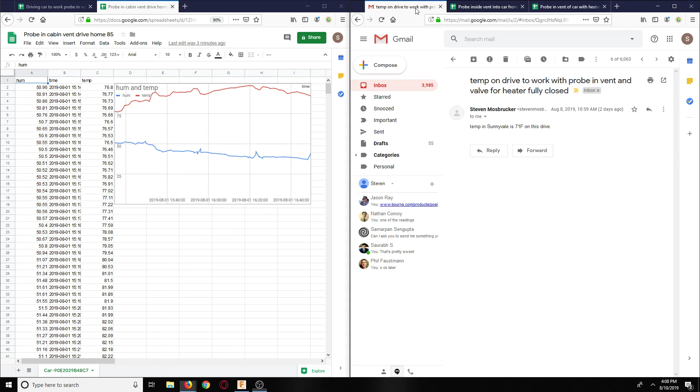So braking, I am working on a little bit, figuring out what kind of brakes I'm going to change to, and when I order that stuff, we will talk about it when that time comes. So I'm going to try to keep this video as short as possible compared to my last video. And I think here I have quite a bit of data. Speaking of which, let me bring this to the other screen and let me look for it. 1979. Okay, there it is. Yeah, that's it.

Okay, cool. So basically, one of the things that I wanted to get in control is not necessarily having to do with the turbo, but in general, it's for ease of driving, and I would definitely like to do it before the turbo, and it's going to be pretty easy to fix. I actually have two parts for it, and I'll show you the second part. I don't know if you remember, but I talked about it briefly in my YouTube video, so let's go ahead and look at that YouTube video again.

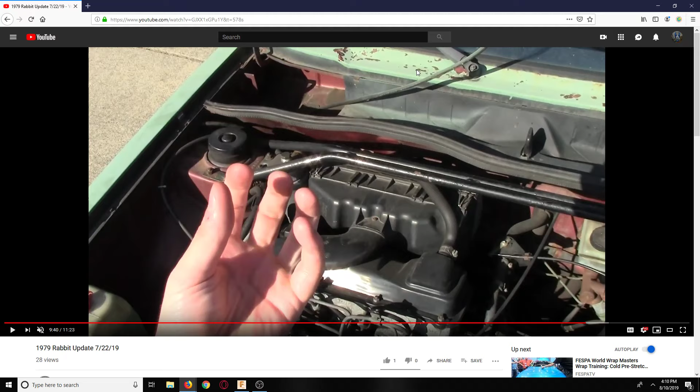Pretty much what I was doing was showing you guys me looking around the car, and we saw that there is this heater box, right? And there's this heater area where the intake inside the car is coming from. So here it is. The idea here is we're going to be talking about this intake again on this side for the inside of the cab. We talked a little bit about the intake here, and we do have some updated information on that, so that will probably be the second video for today, and then the third video is going to be on the Mustang.

So here, of course, we have this tray here that doesn't let water go inside your heater box if it's perfect. In my case, I have some holes and stuff, so water can still drip inside. But basically, the idea is that there is this box, and in the hood there are holes, and the air comes across and goes down into your intake into the car, whether you have the motor on or off.

Now, there are two holes here, one here and one here, so that if rain gets down there, it can fall inside the corner of the engine bay and out onto the street. Normally there's supposed to be a rubber grommet that goes there, and I actually found the rubber grommet. So let me show you where you could get that. I bought it for 20 bucks because I've recently been going through eBay looking for this kind of stuff. So let me go ahead and show you that.

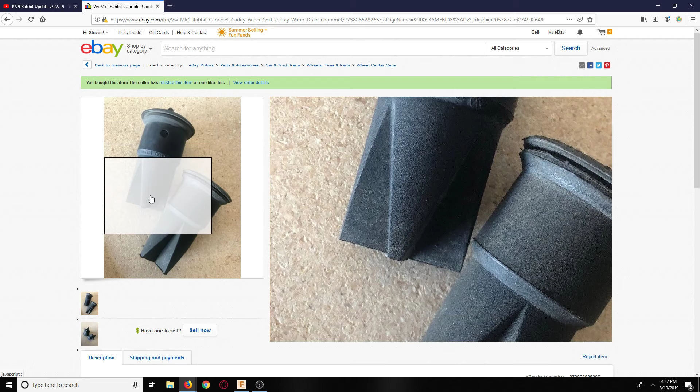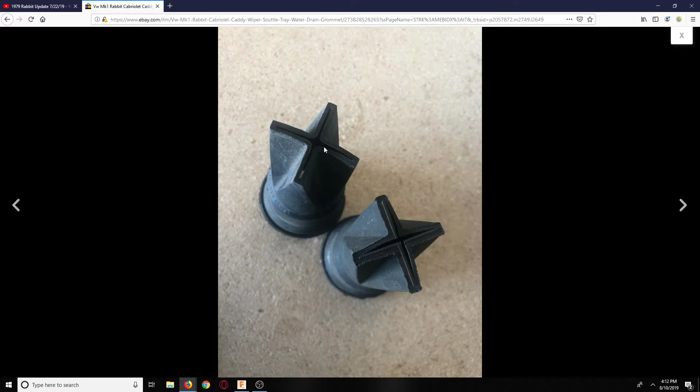Oh, there it goes. So I did buy the grommets here. So these grommets go inside that metal piece, and pretty much what they are, they're rubber, and they close up almost all the way. They close up here, and then when water gets on top, they open, they let the water come out. So if there's any sort of weight on here, these are so thin and so flexible that it lets the water drain out, but it does not let a lot of the heat come in.

And then on the passenger side, you have the tube for your sprayer go through there. And so this is going to be a big upgrade, and we're going to do some more testing after I install these guys. I don't know when they're coming in. This case, Monday the 19th, so it would be 9 days, but today's Saturday. I think I ordered it Saturday last week, so maybe this coming Monday I'll have it. I'll have to look at the tracking details. I might look at it on the other screen.

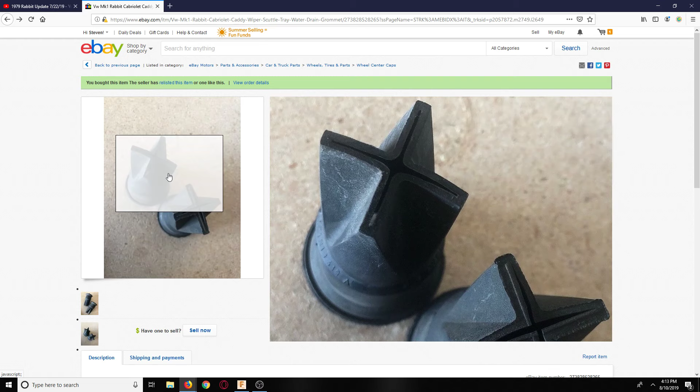So if you don't already have this on your Rabbit, definitely get this. This is going to really help keep you from sucking in hot air in here. So again, that grommet goes here and goes here on the other side, and 23 bucks, $3.50 shipping from Indio, California, which is already in California, so it's great for me. And that's what the Rabbits use stock. My neighbor's car also has this on it, and so I know for sure it's definitely a stock item.

So I don't know, it might be a reproduction, and here's a scuttle tray, I guess they call it. This might be a reproduction, but very, very similar to the original, and I'm sure it's going to have similar performance to the original. Oops. So again, get that guy if you don't already have it and you just have holes here. Don't tape it like I did. Put the right thing that goes in there. So now I don't have to print anything. So now we have limited the heat that could possibly come up through the holes, go inside, and then go down, which I'm pretty sure I looked at that.

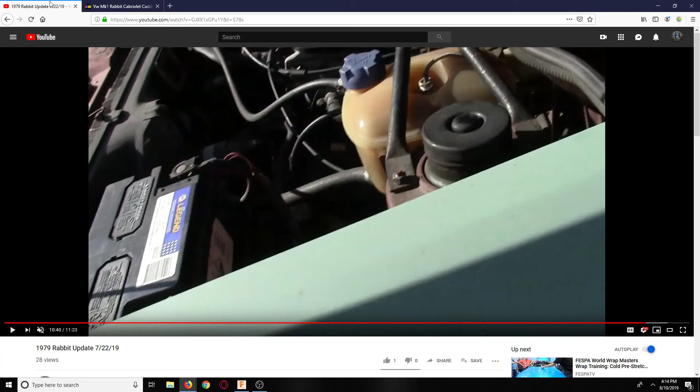Yeah, so it's right up in there. Anyways, so now we have those plugged off. So now a big thing, what I'm curious about, is what I talked about in the last video, which was where the heat, oh, there you go. See the holes? If you have holes like that, then you need to plug them with those rubber grommets. And here I'm showing what the rubber grommet is, and I finally found some, so that's good.

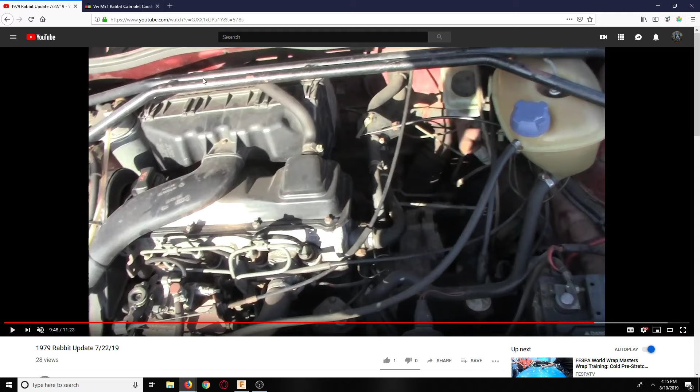Anyways, so the next question is whether or not it's getting so hot here behind the engine that this is heating up, that we're getting a lot of heat exchange through convection, like I said, which is one stationary piece of solid material and then a moving fluid, usually air or water. So in this case, we have air going across here and sucking some heat inside. That's one option, and the other option is that there's this valve here. And this valve is basically what controls the heater inside the car. So this is what allows heat to go inside or not go inside.

And if you notice here, this is closed. So all the way this way, with the rod pushed all the way out, that is cold, and pulled all the way in, that's hot. So if you notice here, there's a little spot here and a little spot here. Now, if it's all the way touching this side, it's for cold, so it does not let any fluid in. The valve is completely closed. And you notice that it's 90 degrees. So the valve is completely closed. Now, this other way, the valve is a little bit even past open.

So let me go ahead and show you guys that with this. So here's the valve itself. So this way is closed, right? And if we look here, you can see that this is this here. So yes, this guy here is closed, and then this is all the way open. So this lets all the fluid in and this closes the fluid off.

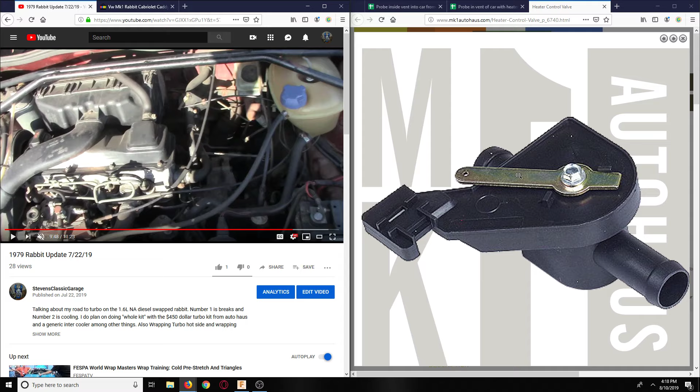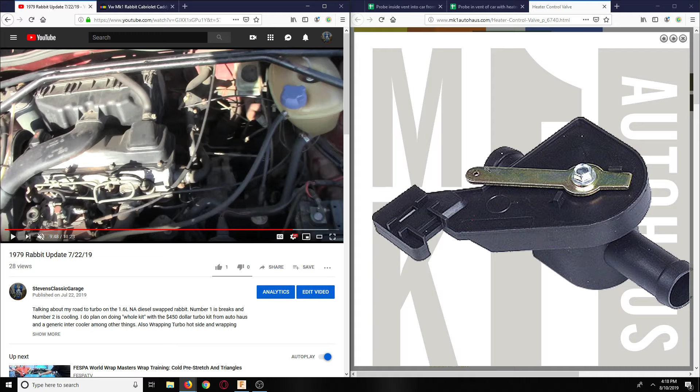So in order to go 90 degrees with this particular throw that your heater controls can do, one of the things that we can do is we could shorten this up. So we unscrew this thing, cut this off, round it because we have it taken off, and then put the hook back on there, right? Put the hook hole over here somewhere. That way, when we push it all the way, it'll actually go all the way closed or all the way open for the heater itself.

But let's go ahead and see if that is actually a factor. So that's one way of fixing it. That's the easiest way of fixing it. So either the valve is messed up, and we'll see right now if it's messed up or if it doesn't actually close any further, because we have some values. So let's see here.

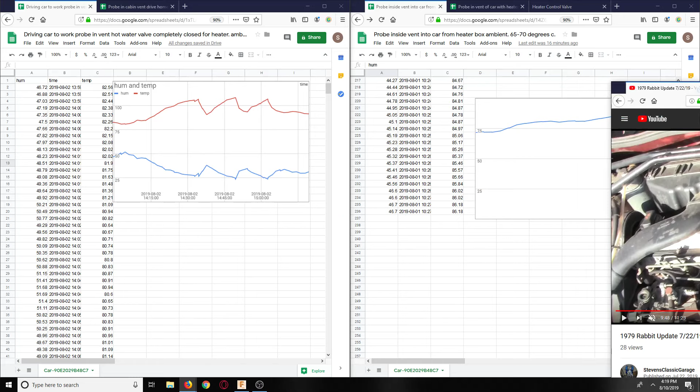So drive home. So this is drive in the morning. So here, driving to work with probe in vent, hot water valve completely closed. So this side is with the valve completely closed. So basically what I did is I went inside the hood, and I just pulled this guy until this closed all the way. I should have taped it, but I looked after I drove home and it was still closed all the way through.

And then I had this with normal, where it wasn't completely closed, and it was just where I would push the heater control all the way to one side. So this is probe inside car, and these are both the same day, whether it's driving to work or driving home. And both of them I have the ambient temperature. So 65 to 70 degrees, and it wasn't Celsius.

And this is drive home, 78F. So you can see it was very, very hot that day. It went up another 8 degrees towards the later end of the day. So right here we have the temperature plotted, and remember we have to take this with respect to 65 to 70 degrees. We can think of it as 70 degrees. So if we look here on this guy over here, we see that ambient is 71 degrees.

And at 71 degrees, we are up at 80. Let's see at the start. So here at 65 to 70 degrees, and then this one's 71 degrees. It seems like we're up at 82, and here we're up at 71. And as you see, as we continue, it is increasing temp.

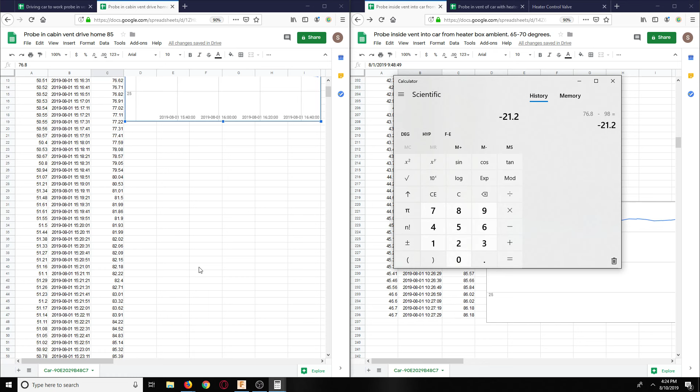It looks like the maximum, we're still going. Saw 98. And we're going down. That's 21 degrees. So we start off 76 and we go up to 98 degrees. So maybe we might have a leaking valve in this case. It might not be closing all the way. So that might be a possibility. So let's look at this one, and then let's look at this one.

So this is driving car to work, probe in vent, hot water valve completely closed. So here we're starting out at 82.56, and here we're going up to 105. 107. It's also 22. So very, very consistent. But you can see here that we're staying pretty low, then it goes up there. I was probably sitting in traffic for a while, and the sun was baking down on it, and I didn't really have any airflow coming through.

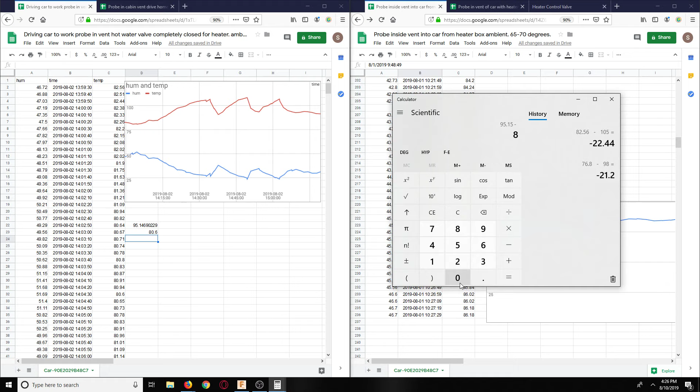So let's see, can we run an average? Let's run an average. So average is 95, and then let's look at the min. I don't know if I could do this. Let's see. Yeah, 80.6. So 95.15 minus 80.6 equals 14.55. Okay, so that's good. So let's look at this one. Let's do the same deal.

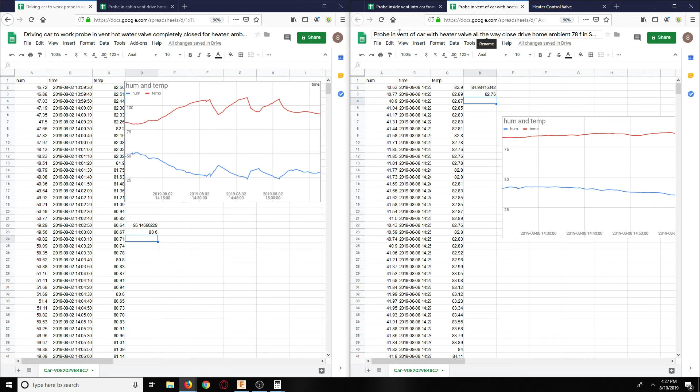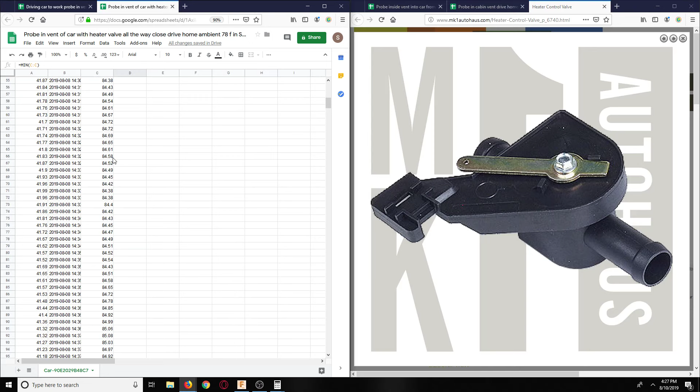So that's only 9. What about this one? This one's only 2. Wait a second. This is probe in cabin vent. So this goes over here. This one goes over here. Okay, so now we look really, really good here. Yeah, this is a good... So this one might not be the right one then. Drive car to work. So it's driving to work. But this one I'm driving home.

Yeah, 78F, that's in the afternoon. And I think this is the most recent footage. And I did notice while driving that it was quite a bit cooler than it normally is, so we definitely had that on our side. So pretty much what it looks like is here, car drive home.

And then this is really very, very hot outside temperature. So 76.46 minus 91.85 is going to be a negative number, obviously, but that's 15 degrees, and then this one's 2 degrees, right, from start to finish. And then this is only 4 degrees, so at maximum, it jumps 8 degrees compared to ambient, which is really, really good.

Because again, ambient's changing as far as where we go. So it could at some points have been 80, it could have been less. But let's say 78 degrees Fahrenheit average. But I don't know what happened here. It looks like some stuff was all over the place, because it's jumping up and down erratically, pretty much.

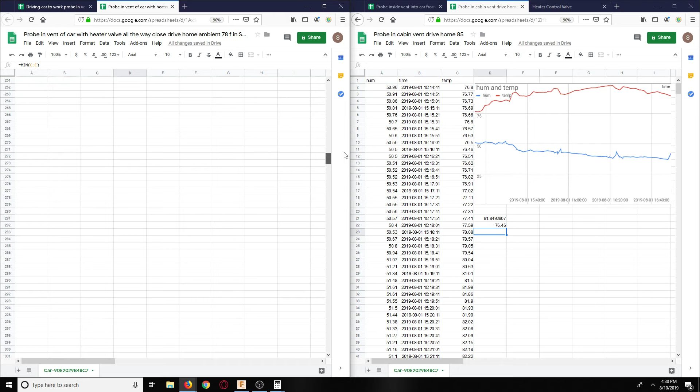Because this one, I'm sure that this is a long one, so this is from 2 to 480. So that's 48 minutes. That's about a 50-minute drive home. So that's definitely a longer time sitting in traffic. Now this one is 2. Oh, this is a short one. So this is a 25-minute drive to work, looks like. Oh, drive home. I might have drove home on that one at 2 o'clock.

So what I'm thinking is that this is definitely an issue, that it's not closing all the way. And you can see here these two, which are both inside the vent with just regular heater box closed. This one we have a 9 degree. This one we have a 5 degree or so. This one, I don't know what happened with this one, why we have a 40 something, while we have a 5. Wait.

Oh, that's a good one. Yeah, this is a 15 degree delta here, because I'm thinking that that's a really, really long drive home. But so is this one. This one's 571, so this is a 57-minute drive home. So why is it exactly that? I don't know. So maybe this is dirty data here. The data here is probably messed up, or the probe didn't go all the way in, or whatever.

So obviously, I'm kind of trying to match it to meet a conclusion, but I don't think that is the case, because this is pretty erratic here. You could see it here. That's pretty erratic, and I think it has a lot to do with maybe where I was. It was way hotter than that, and so I would sit in the traffic abnormally long here, and it would get super hot, and then I would start to move and drop, get stuck in traffic, and go. That's why you have this sawtooth looking piece here.

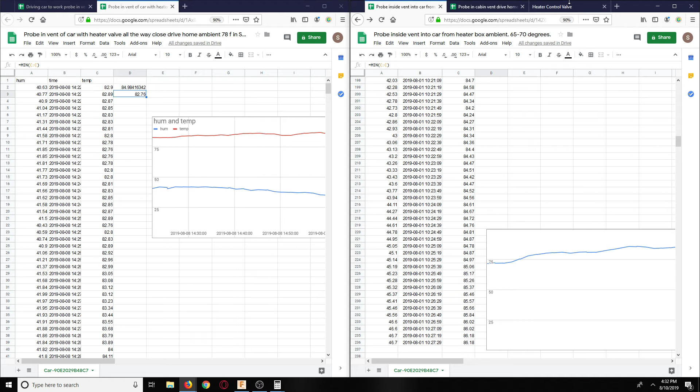And then here it's very, very smooth. Here the graph is at the bottom. Here it's extremely smooth. And here it's nearly flat. So what I think we should do is look at getting a new valve, but I think that the valve has the same sort of throw here, which I think was just on VW's part, the German manufacturer part, a big issue on getting that throw right. I think just that throw was not right.

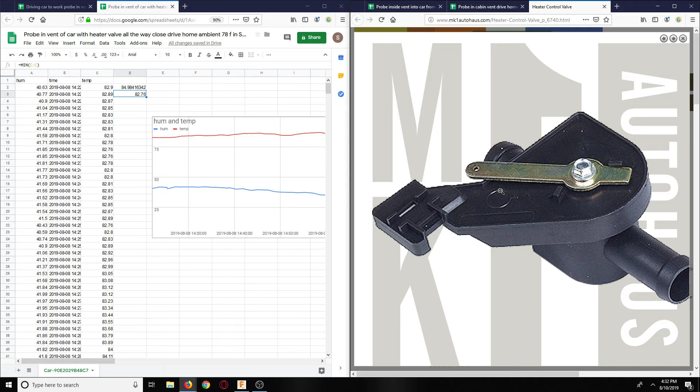So I think this will help a lot for my drivability on the inside of the car and get that taken care of. And the last cheap thing that I think that we need to do is... okay, so thermal. Okay, so let's see. Does this have what I'm looking for? Okay. Ooh, doesn't have it. Anyways, okay.

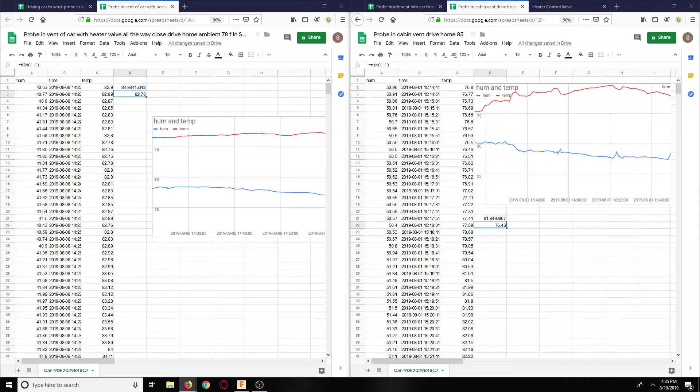So basically, let's look at these two. So one of my ideas is to lower this thermal conductivity through here to the air. So one of my ideas is to shoot rubberized undercoating or bed liner inside, or paint it inside the scuttle tray here, so that when I am stopped in traffic and this heats up, there's going to be very bad thermal conductivity to the air when it's sitting there stationary.

I don't think I have that big of an issue when the air is moving, but showing you guys this one right here, you can see that when I stop, it does increase drastically. So let's say that this wasn't dirty data, and then from here we can see that drastic increase in temperature when sitting still.

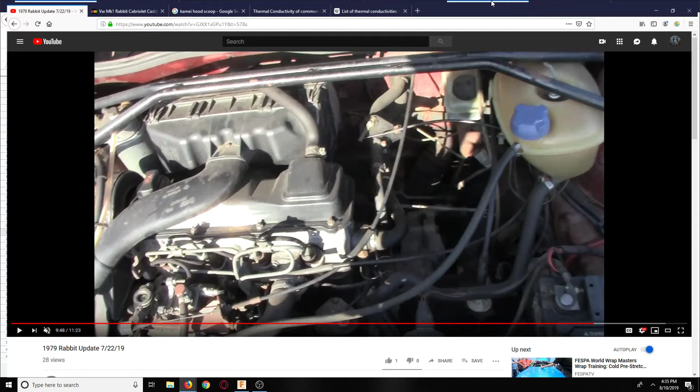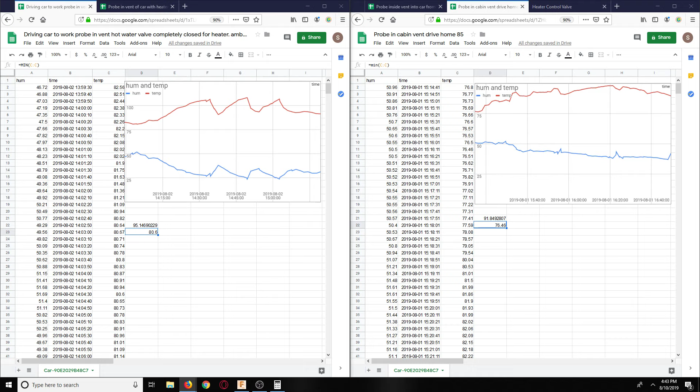So obviously one of the things that we need to work on is this heater valve. So we'll have a mod for this. I'll do the calculations here with a caliper, see exactly what this distance is, figure out the angle, and then figure out exactly how long this rod's supposed to be to give us the most resolution on that heater control, so that when we move it from left to right, it opens all the way and closes all the way.

Because right now I don't think it's even fully closing, so it's going from like here to here. This guy's way too long, because it's only going up to the edge here and then only to like here. So it's only doing like 30 degrees. This arm right here is just too long. So we'll work on that.